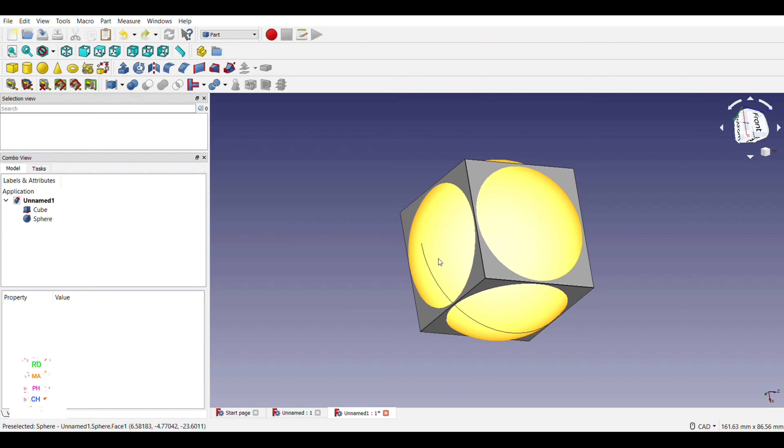I'm going to make a dice. Making an intersection, you got the shape for the dice which you can see here. I have created the sketch and now I'm going to use the pocket option for filling it.

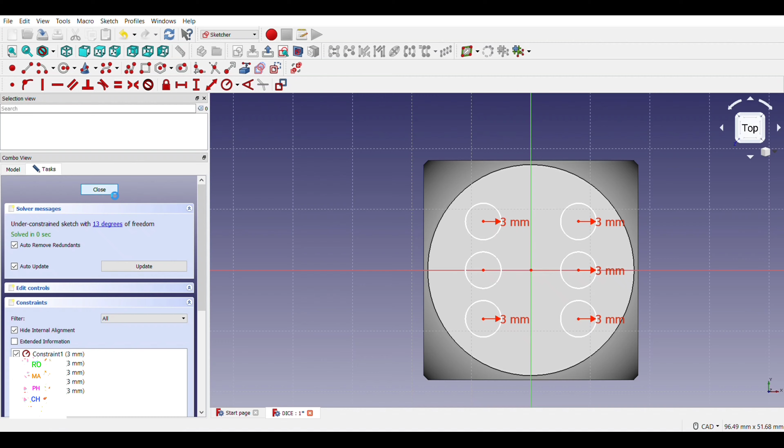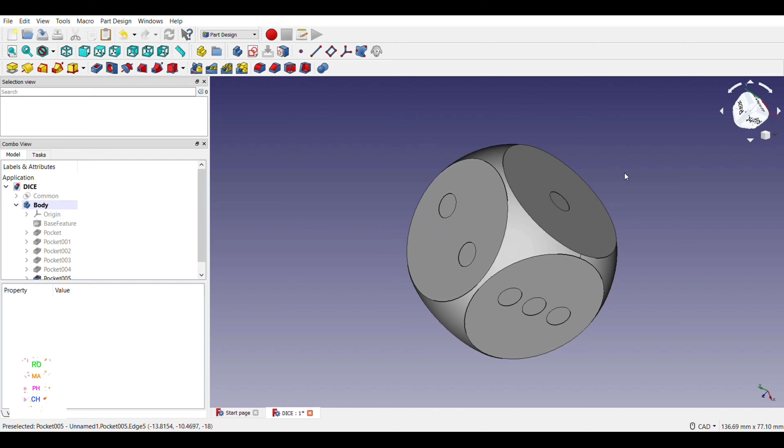And here we are done with all the faces. I have marked all the numbers on its 6 faces. Now it's time for the colors.

By right clicking on this pocket option and going to set colors, I have selected the faces and clicked on the green option to color the dice. Here we can see it.

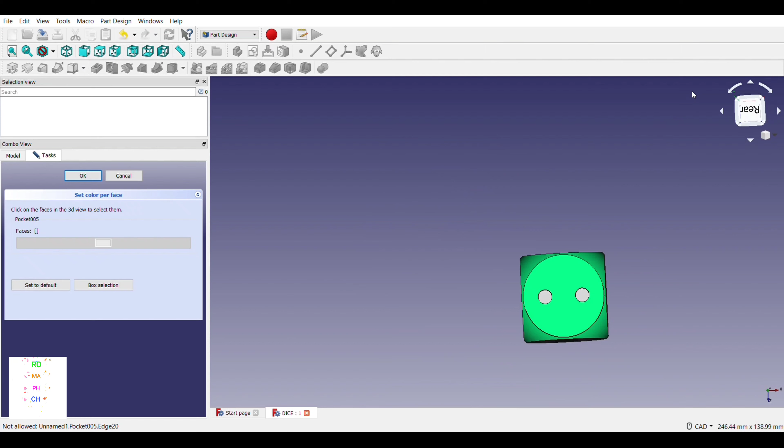Go to mesh design, then meshes, then create mesh from shape, and I have already selected the whole body by clicking on the pocket 5 option. Then I only need to select fine and click OK, and wait for some time.

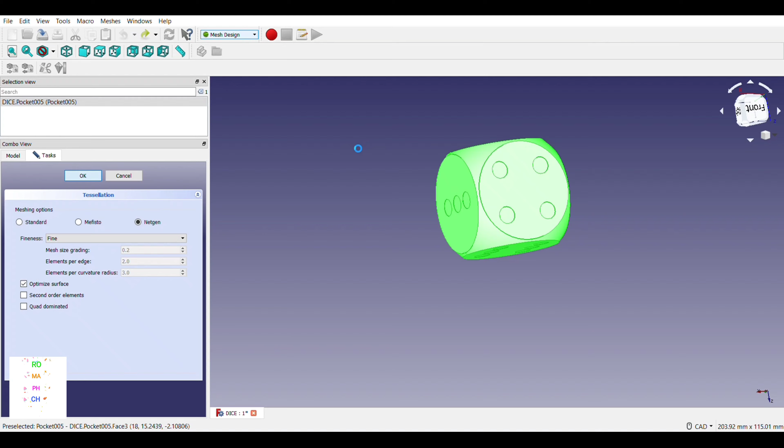Creating the fine mesh, I got this.

Now for the print to happen, we can rotate our dice like this so that we can decide which face is going to be downward or which face is going to be upward.

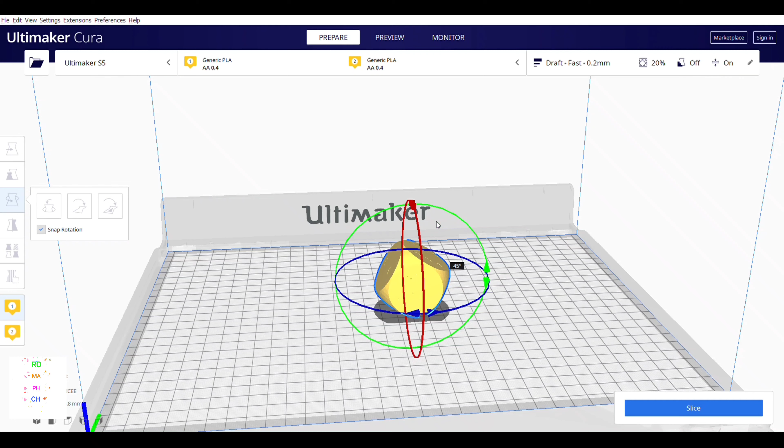During our 3D printing, by clicking on the lay flat, our object is going to lay down on our base. Then select here the properties which you want in your dice and click on the draft fast option.

In the quality option we don't need any change. In the infill option we can change that.

We need 100% infill, since we want the strongest one. The infill pattern I have chosen here is triangles. I can also choose any cubic, say octet or quarter cubic, or zigzag, or cross 3D, any one.

Then material printing temperature is 200 degrees Celsius. Build plate temperature, or the base temperature, is 80 degrees Celsius. And the speed by which it's going to print is 60 millimeters per second.

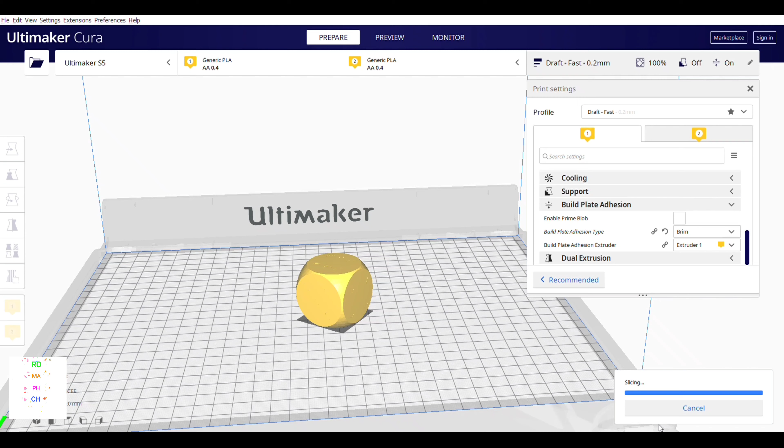Travel, cooling, support, and adhesion - as we have studied, there are three options: raft, skirt, and brim. So I'm going to choose the brim option. Now if I click on slice and then preview, I'm going to see how my print is going to happen.

You can see over here, and now you can see that the upper part where the writing is visible, and this part will also be visible when the print is ready.

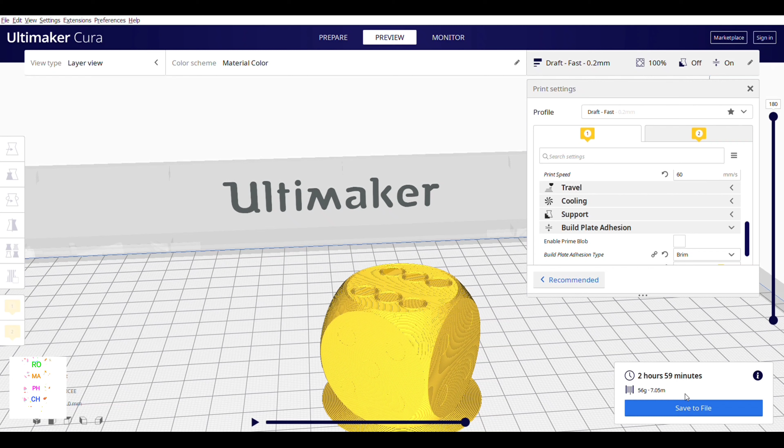You can see it will take almost 3 hours for the print. To reduce the time, as suggested, we can decrease its density, and then click on slice again.

Then I get 55 minutes in which this cube will be made with 20% density, and this is the way how our cube will be made. This shows up the process time to time.

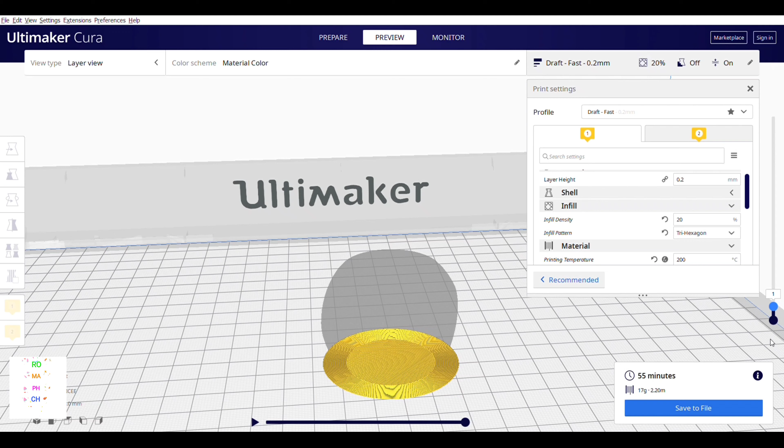If you want to see how it's going to look inside, let's close up with it. And here it is, you are going to see a hexagonal shape - yes, it's a hexagonal shape.

So this is the way how it will be, then click on save to file, and here this is going to create - by clicking on save file it will create a G-code.